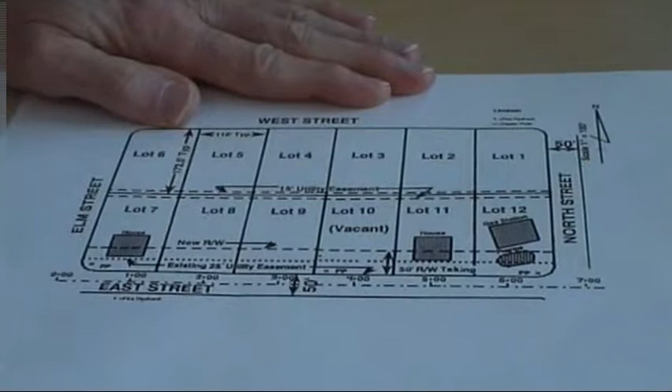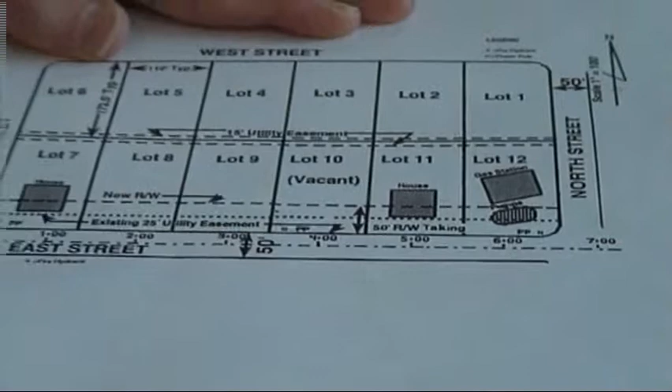We look at our project map and we can find the stationing right along the center line of East Street. We see the marks every 100 feet and we see the labels 0+00, 1+00, all the way up to 7+00. So the stationing is along the center line of East Street, and the project length starts at 0+00 and ends at 7+00, so the project length is 700 feet.

For exercise 4.15, we're going to look at the project map again. On this question, we're asked to get the station and offset for 3 features on the map. The first thing we need to do is look at and find where those features are. And the first thing we want to do is look for a legend. On our map here, we have a legend in the upper right corner.

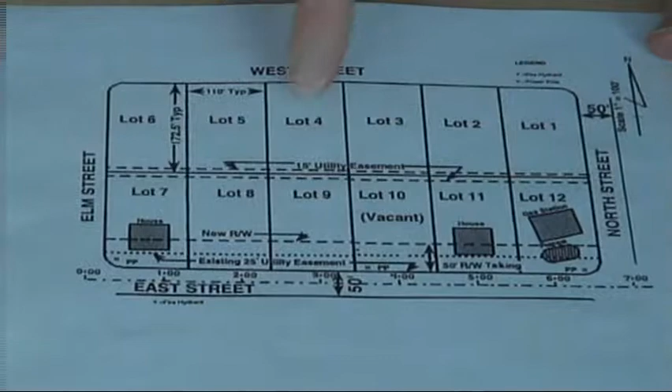So our questions are, where is the station and offset for the power pole near Elm and East Street? So we need to find Elm, which is here on the left-hand side of the project plan. And here's East Street on the south. And we look for a power pole, and there it is right here at the corner.

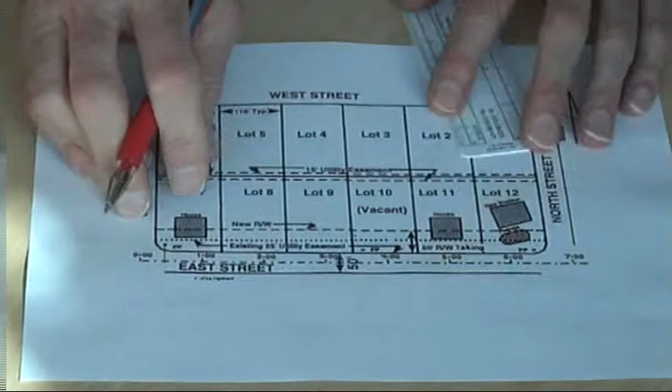So to determine the station and offset, the station is always measured perpendicular down from the feature. So I'm just going to draw a line on here, dropping from the power pole down to the center line, and then I'm going to measure along the center line with my scale, and this is at 1 inch equals 100 feet, which is labeled on the project plan.

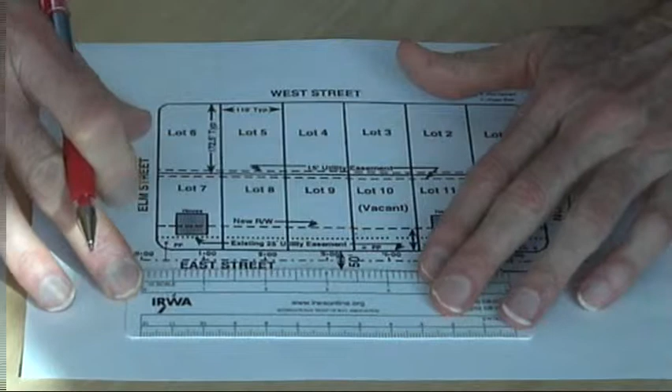So I will lay my 10 scale at the 0 mark here, and I'll measure down to where my perpendicular dropped from the power pole, and I get right at about 4, or 40. So the station is 40 more than 0+00. So the station of this power pole is 0+40.

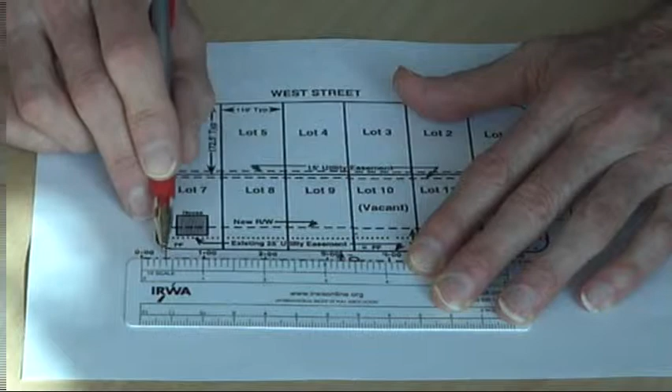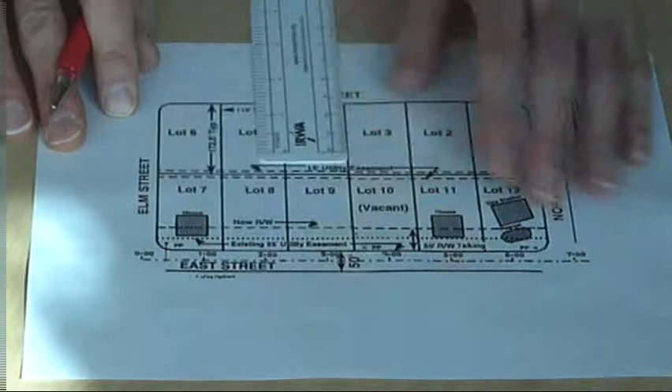For the offset then, I measure from the center line over to the power pole using my 10 scale, and I get 10, 20, 30, 40, looks like a little bit more than 40, maybe about 41 or 42. The offsets are always either left or right of the center line as you look down the project. Our project's going from left to right, so if we look this direction, that offset would be on the left. So the answer for number 1, the station and offset of this power pole, is 0+40 and 41 left.

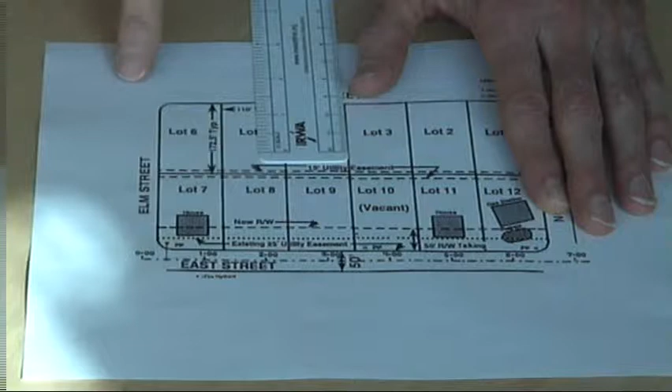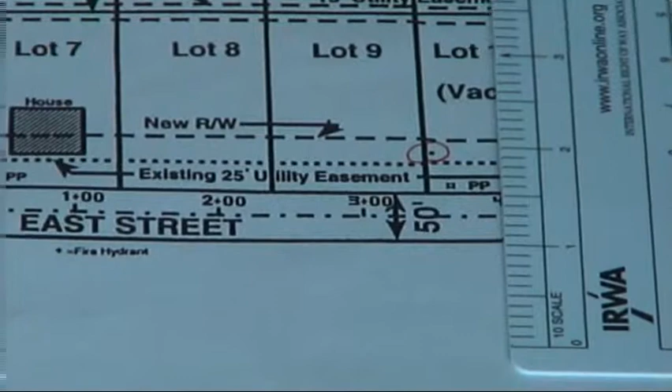Next we have the fire hydrant. So we need to find the fire hydrant on this plan. We remember on our legend, we also have a note in the lower left, a little bit of a legend, fire hydrant. So I look on the plan and try and find it, and it looks like it's right here. So again, we're going to drop a perpendicular down to the project center line from the fire hydrant.

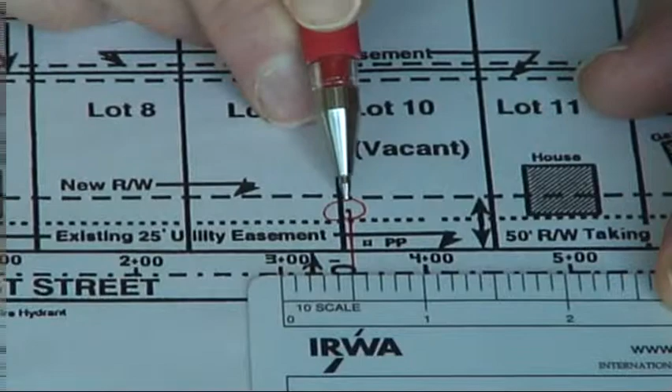And then we're going to scale, again using our 10 scale, forward from the nearest station, which is 3+00. So I will put my scale here, and I will come over, and it looks like it's maybe just a little bit more than 50, maybe 51. So station 3+51.

Then our offset, again I'll measure from the center line over to the fire hydrant: 10, 20, 30, 40, 50, 60, looks like about halfway between the 6 and 7, so it will be about 65. So the answer for the station and offset for the fire hydrant is 3+51 and an offset of 65 left.

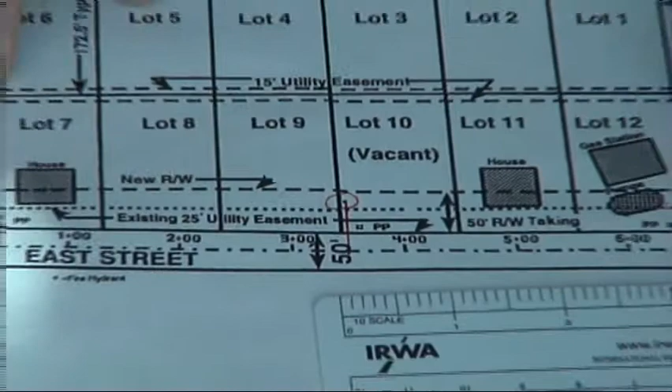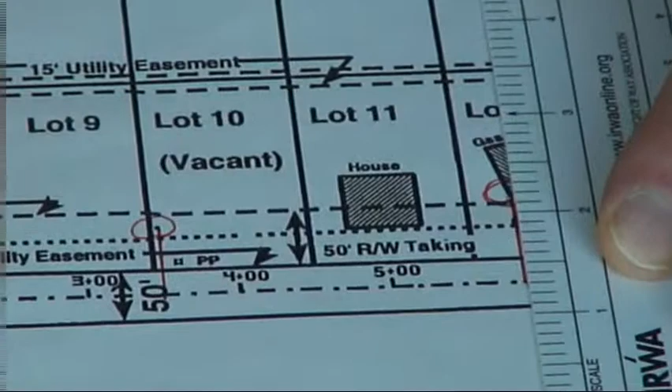For the gas station, we're probably asking about this nearest corner of the gas station, which is right here. You see the gas station labeled here. So we're going to again drop a perpendicular down to the project center line from the corner of the gas station. Then we're going to measure forward from our last station, which is 5, using our 10 scale again. There's 50, 60, 70, 80, maybe right around 90, maybe a little bit less, something like 5+88.

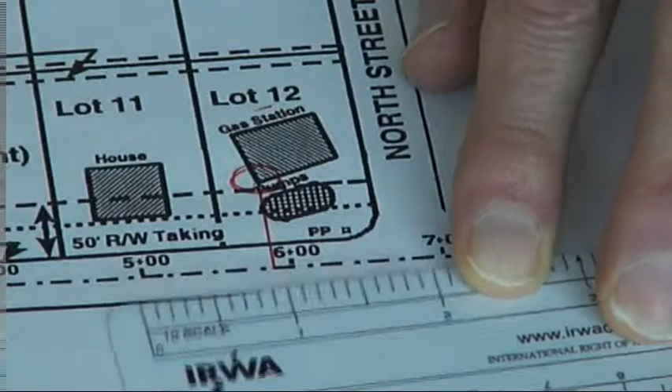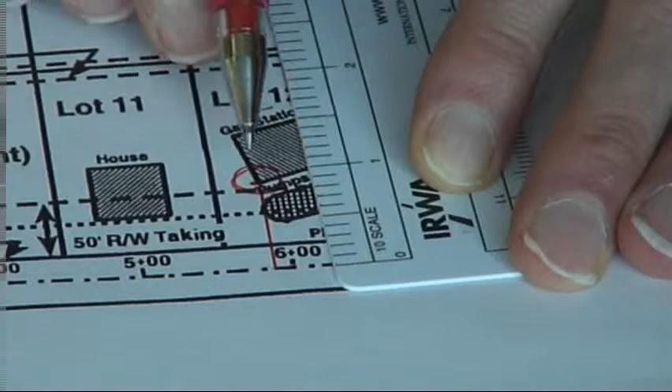And then we measure our offset again using our 10 scale from the project center line over to the corner of the building. There's 50, 60, 70, looks like about maybe 85. So the answer on the corner of the gas station would be a station of 5+88 and an offset of 85 left.